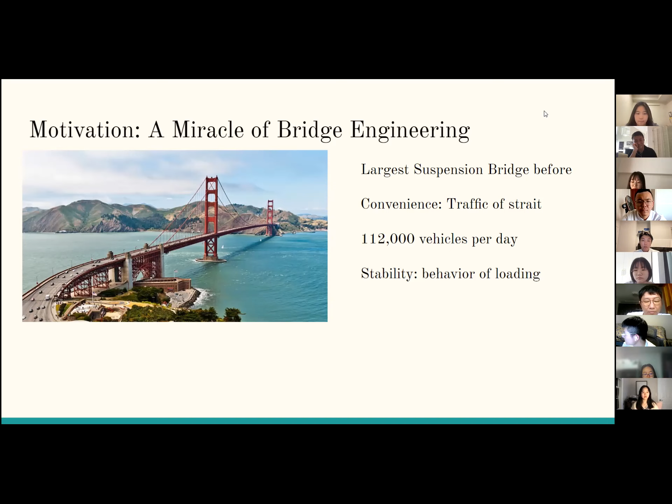This heavy traffic causes a large load, so it is important to research the stability behavior of the loading and the Golden Gate Bridge's structure. Well, there are several objectives. The first one is to complete the modeling of the bridge. The second one is to study the deformation at different frequencies. And the last is to research the live load and the harmonic response.

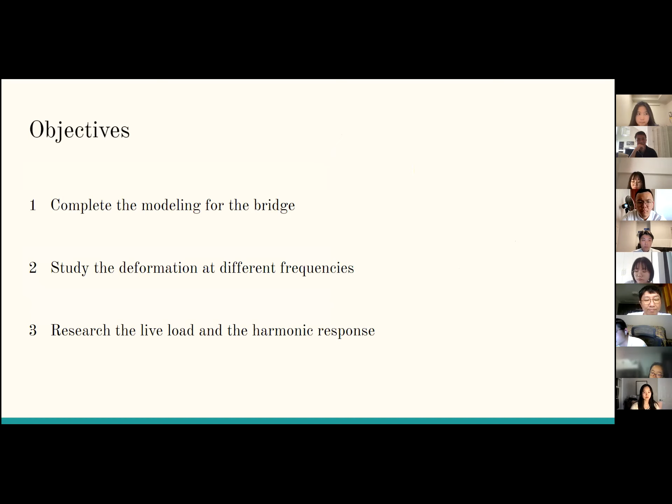Several details about the bridge have been shown on the screen. Well, in the 19th century, the American gold rush began. The Golden Gate Channel separated San Francisco from California, where the city's population had soared. The idea of building a bridge came from this, but due to bad factors such as the geography and climate of the Golden Gate Strait, the construction was extremely difficult, and the bridge was opposed by many parties.

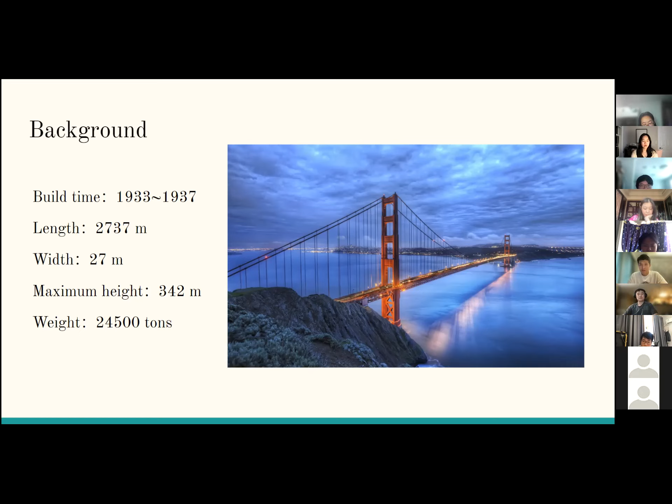Then the Bank of America issued bonds, and in collaboration with Joseph Strauss and the workers, designed a bridge that was considered impossible at that time. After completion, the Golden Gate Bridge was one of the largest single-span suspension bridges in the world, and at the same time, it also has the fourth highest bridge tower in the world, which is a miracle of modern bridge engineering. Then Peter will introduce the methodology.

So let me talk about the methodology of our group. I made a simplified model of the bridge in ANSYS based on the real size of the bridge mentioned before. The bridge is 2,737 meters in length and 27 in width. The model is just composed of 3 cuboids, and I put some holes in it to make it more like the real one. Our group gave up the cables and the other details on the bridge in order to simplify the calculations, which also helps us avoid making mistakes when making the model.

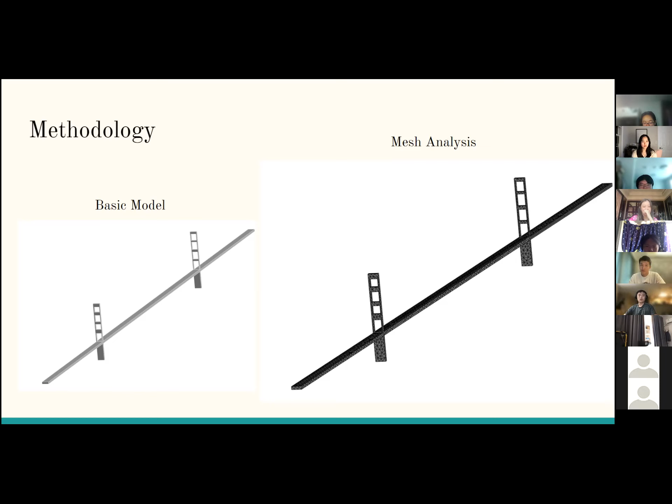So our next step is to do modal analysis. Our group put meshes with an element size of 10 meters on the model. Because of the bridge size, the whole model looks kind of dark. You can see in the picture on the right, it is so dark. It is black. And then next page. And then we get the frequency of the bridge, which is on the right of this page. You can see the first picture. This is also the data for our modes, which will be mentioned by Andy in the result part.

Also, we use different element sizes of meshes to verify the frequency we get. We chose 6 meters, 8 meters, and 12 meters, and the 10 meters we mentioned before. And here is a chart that I made in Excel, which shows the relationship between the different element sizes and the minimum frequency of each element size.

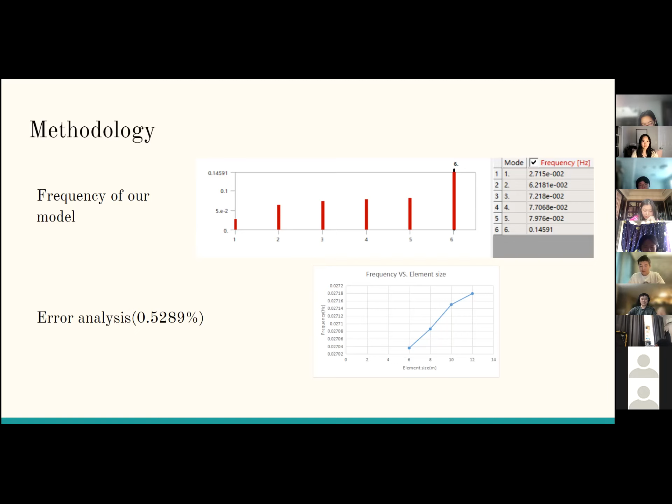Then we take the largest minimum frequency of the 4 minus the smallest minimum frequency, divided by the minimum frequency. And then we got the error, which is about 0.5289%, which is acceptable because it's just a little error. Next page.

So our group also considered the live load of the bridge, because in the harmonic response part, we need to calculate the stress on the bridge to make the models. We got this data from the Golden Gate Bridge Research Library, which is the official site of the Golden Gate Bridge. We use the live load on the bridge divided by the area of the bridge, which is the length times the width of the bridge. We get that the stress on the bridge is about 222.22 Pascal.

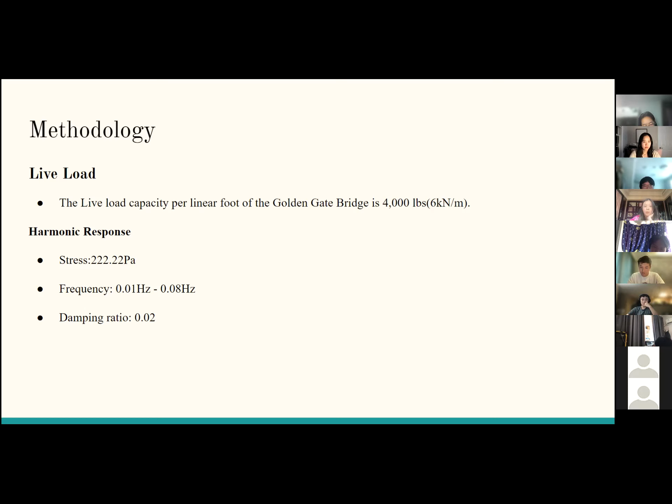For the frequency part, we chose a range which is a little bit larger but includes the frequency range we got. The frequency is about 0.01 Hertz to 0.08 Hertz. And then we chose a damping ratio of 0.02. And then Andy will talk about results and discussions.

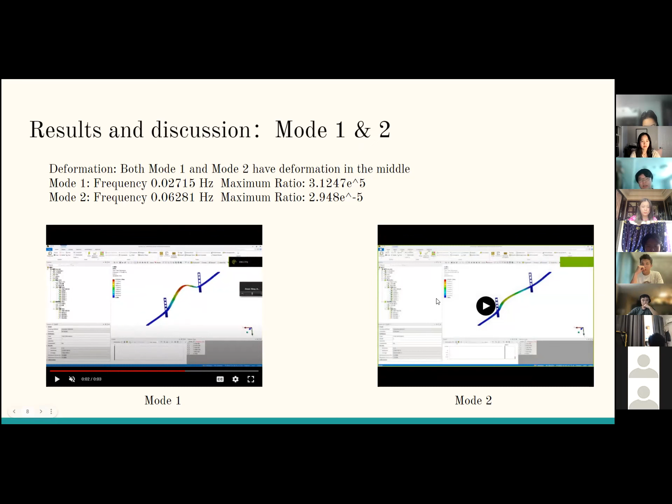So there are in total 6 modes of the bridge model, and the first mode and the second mode are pretty similar. The deformations both appear in the middle part of the bridge. As you can see, here is a video of mode 1. And this is a video of mode 2. As you can see, mode 1 has a vertical deformation in the middle part, and the maximum coefficient of deformation is 3.1247 times 10 to the negative 5th.

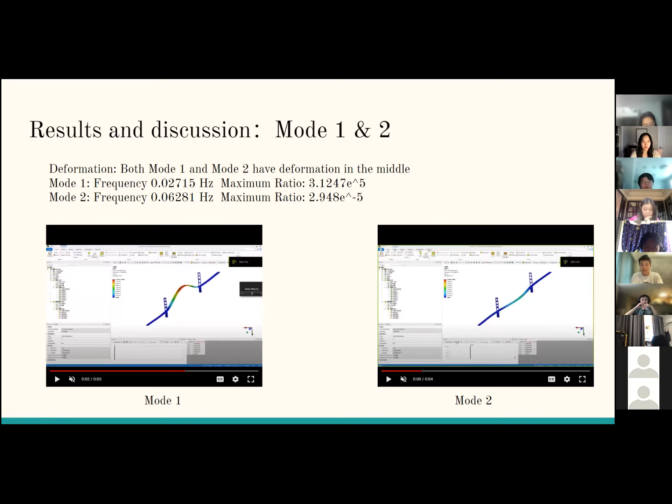For mode 2, there are both horizontal and vertical deformations of the bridge, and the frequency is 0.06281 Hertz, and the maximum coefficient of deformation is 2.948 times 10 to the negative 5th. And then for our third mode, the frequency is 0.07218 Hertz, and here is the video. So at this time, the whole bridge deforms, and the maximum deformation points appear at both end parts of the bridge.

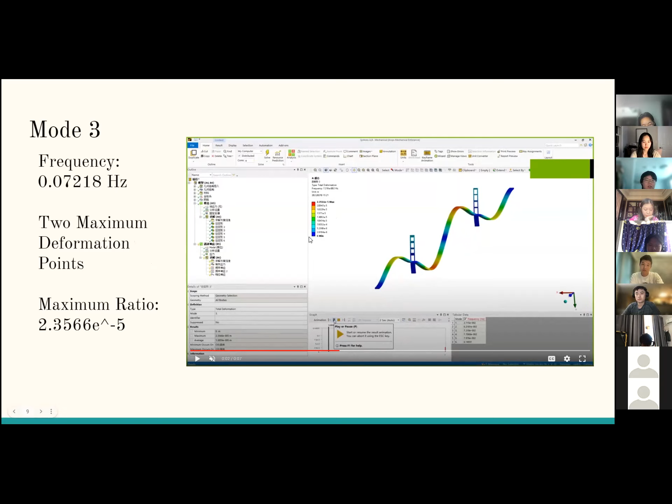And the middle part has the maximum deformation point, and the maximum coefficient is 2.3566 times 10 to the negative 5th. For mode 4, the frequency is 0.077068 Hertz, and at this time, the deformation appears at both ends of the bridge. Here's the video.

As you can see, only the 2 ends of the bridge deform, and the maximum deformation appears at the middle part of the end of the bridge. The maximum coefficient is 3.1756 times 10 to the negative 5th.

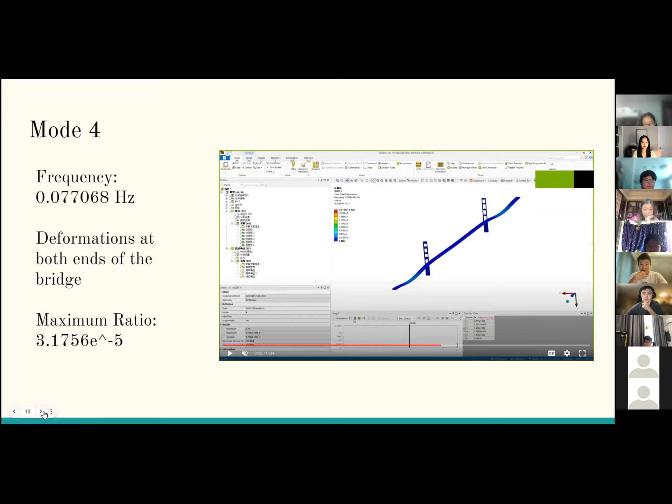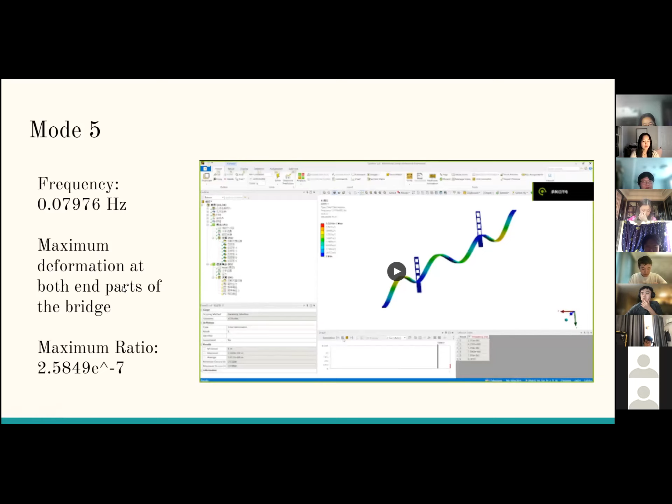Now for our 5th mode, the frequency becomes 0.07976 Hertz, and here's a video. This one is similar to our 4th mode. The whole bridge deforms, but the maximum deformation appears in the middle part of the bridge. And the maximum coefficient is 2.5849 times 10 to the negative 7th.

Then for our sixth mode, the frequency is 0.14591 Hertz. At this time, the tower between the bridges also deforms. And here is a video. As you can see, at this time, the maximum deformation appears at the top of the tower, and the maximum coefficient is 4.1926 times 10 to the negative 5th.

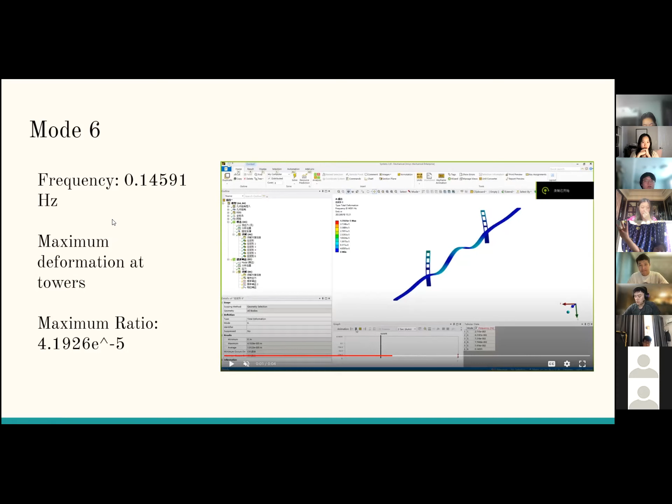So after analyzing these 6 modes, we're going to research the harmonic response. So here is a graph of the frequency and amplitude. As you can see, the maximum amplitude appears between the frequency of 0.025 Hertz to 0.03 Hertz, and the minimum amplitude appears between 0.05 Hertz and 0.06 Hertz.

So after that, we can find the equivalent stress. So on the picture on the right, we find that the frequency is 0.0268 Hertz, and this frequency is in the domain of our maximum amplitude, and the sweep is negative 56.649 degrees. And then when we enlarge the picture, we find that the maximum stress is at the joint part between the tower and the road. And the maximum coefficient is 1.5487 times 10 to the 7th.

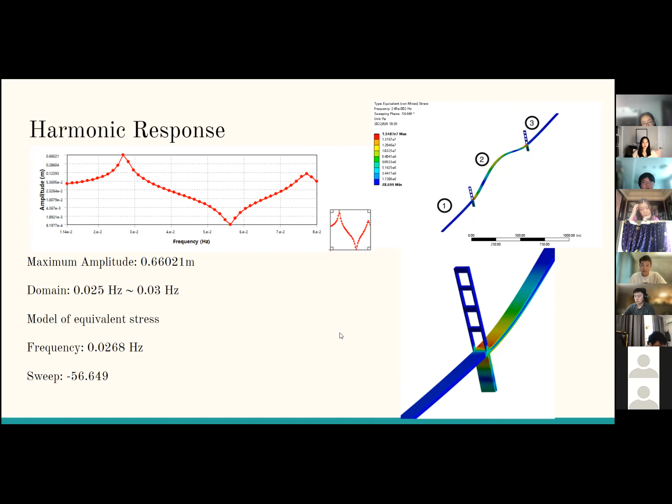And this means that when the frequency is in the domain of maximum amplitude, we should be focused on the stability of the joint part because the equivalent stress is the largest. And Elvis will give you a summary and conclusion.

Our research analyzed the stability of the Golden Gate Bridge by doing a finite element analysis on it. Mesh analysis was adopted and the 6 modes of bridge deformation were analyzed by building a simplified model. Also, the harmonic response model was made based on the live load, frequency, and the damping ratio. Mode 1 and Mode 2 showed the deformation in different frequencies. Mode 1 showed that the deformation mainly appeared in the middle part of the bridge and the center of it showed the maximum deformation. Mode 2 showed the maximum deformation part moving towards the right part of the bridge.

Mode 3 showed the total deformation. The whole bridge had a vibration and each tower between the 2 parts also had light deformation. Mode 4 and 5 showed that the whole bridge has deformations and the maximum deformations appear in the middle of part 1 and part 3 of the bridge. Mode 6 showed that the 2 towers and part 2 have deformations and the tower between part 2 and part 3 has the maximum deformation.

In addition, according to the harmonic response, the maximum amplitude is 0.66 meter when the frequency is between 0.025 Hertz and 0.03 Hertz. The frequency of the equivalent stress model is 0.026 Hz, which is within the domain of maximum amplitude. Moreover, the external load is the most destructive to the joints of the bridge when the frequency is 0.026 Hz. That's it. So I think that's all of our presentation. Thank you.

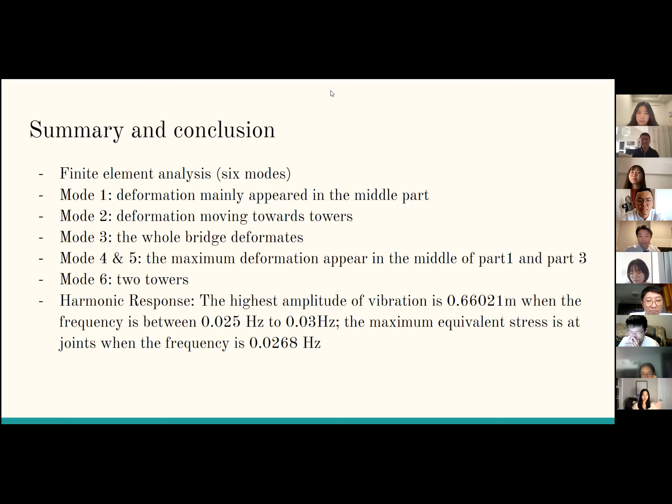Okay, any questions from the students and from the TA? I think that I have a question. Good, I want to hear student questions. I think that you guys did not model the cable from the tower to the bridge itself, and the amplitude that your results show is about 0.6 meters. So have you compared your result to the real vibration amplitude? Can you please repeat your question? Oh yeah, I see that your result of the vibration amplitude is about 0.6 meters, and I'm wondering have you compared this result to the real vibration amplitude of the Golden Gate Bridge?

Actually, we only focus on the damping ratio of 0.02, and then we find an equivalent model, and the domain of the frequency is, as I presented, between 0.025 Hertz and 0.03 Hertz. So we only focus on this condition, so we didn't compare with other amplitudes. Okay, I think I got it. Thank you.